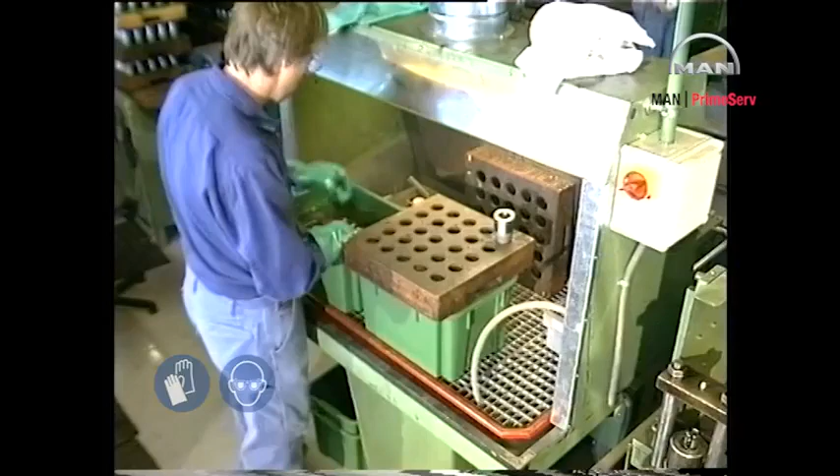All spindle guides are function tested before they are delivered.

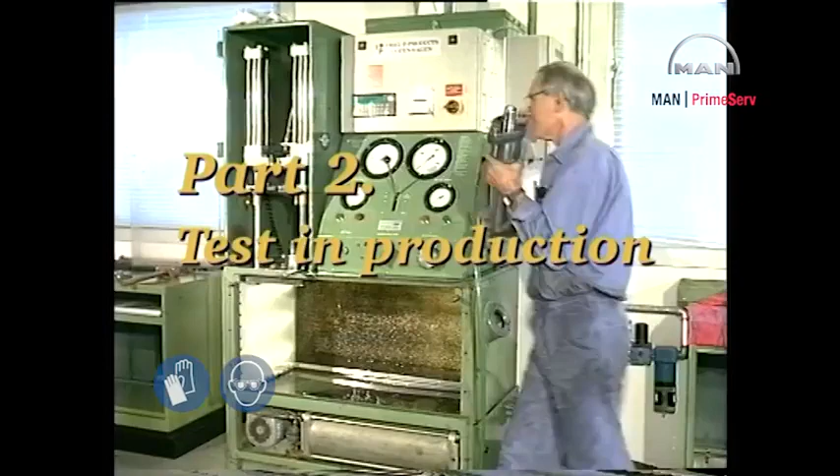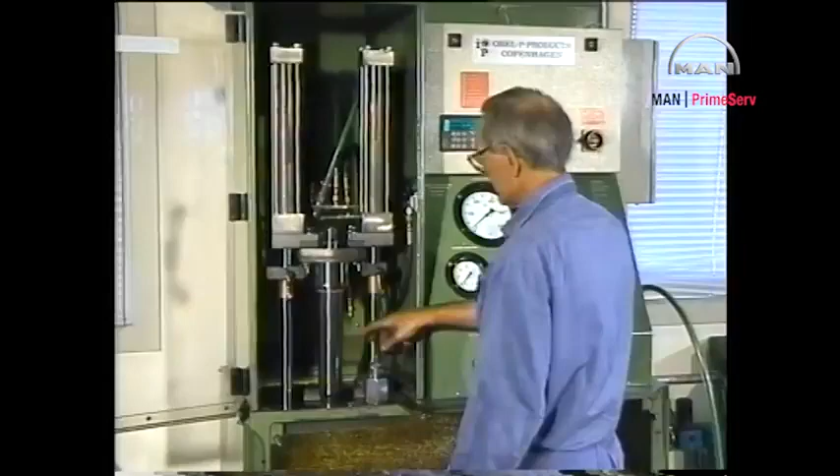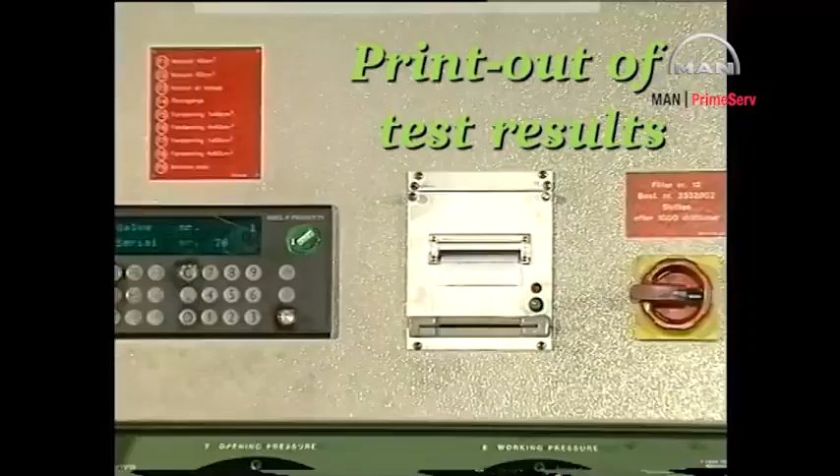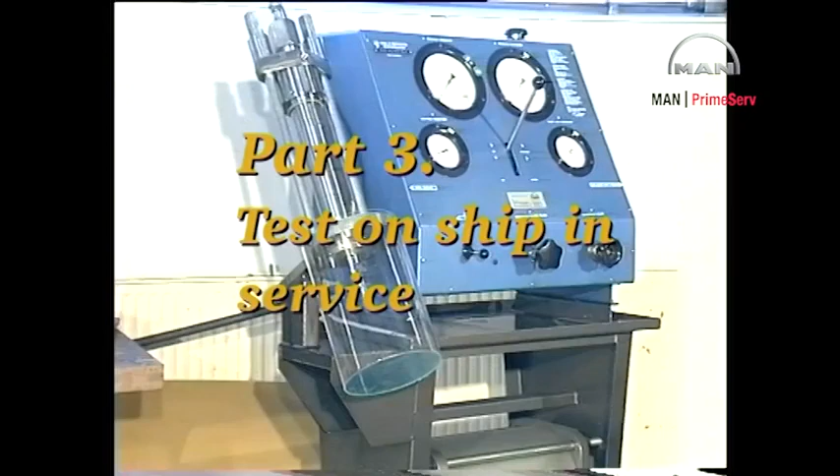All fuel valves are assembled and function tested before leaving the workshop. Overhauled fuel valves or fuel valves taken from stock must be function tested before they are mounted in the cylinder cover. The pressure testing pump is equipped with pressure gauges for displaying opening pressure, working pressure, venting function, and air inlet pressure.

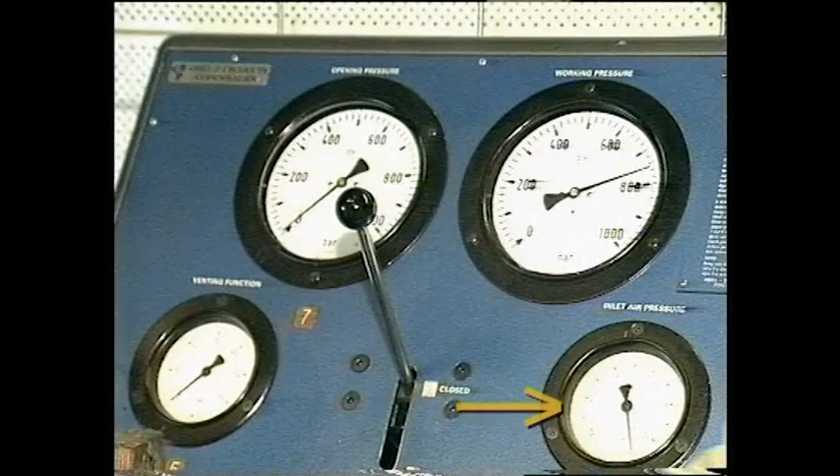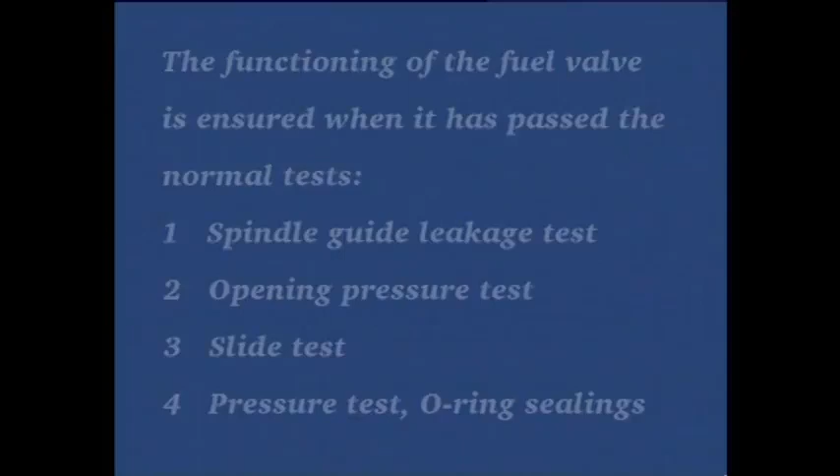Position the fuel valve in the test rig. For guidance on how to operate the pressure testing pump, refer to the supplier's special instructions.

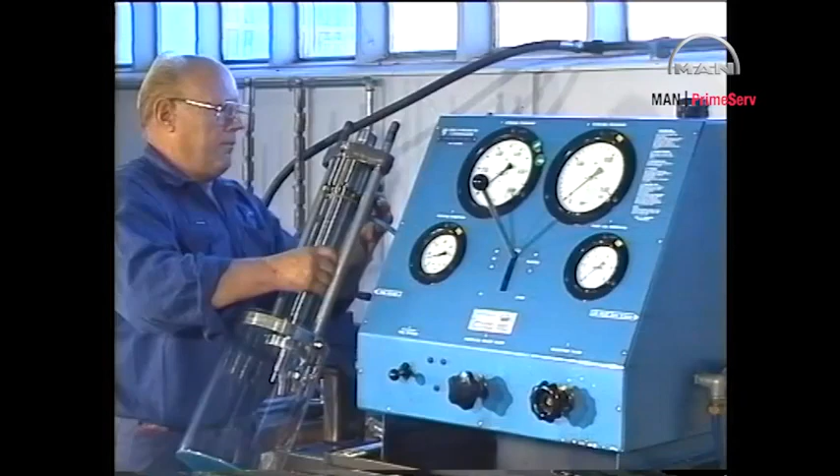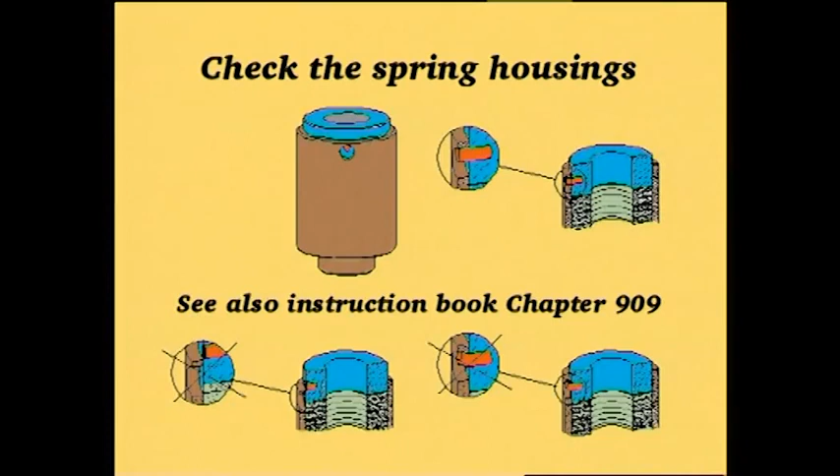To ensure that over-tightening has not taken place, check that the locking and indicating pins have not been bent or broken off. In the event of over-tightening, mount a new spring housing.

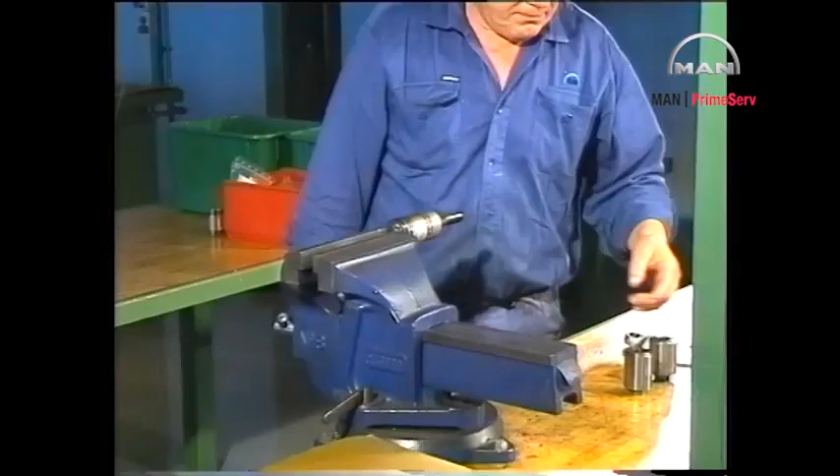A very important element in the correct functioning of the fuel valve, both during testing and in service, is ensuring that the spring housings apply the predetermined tightening force.

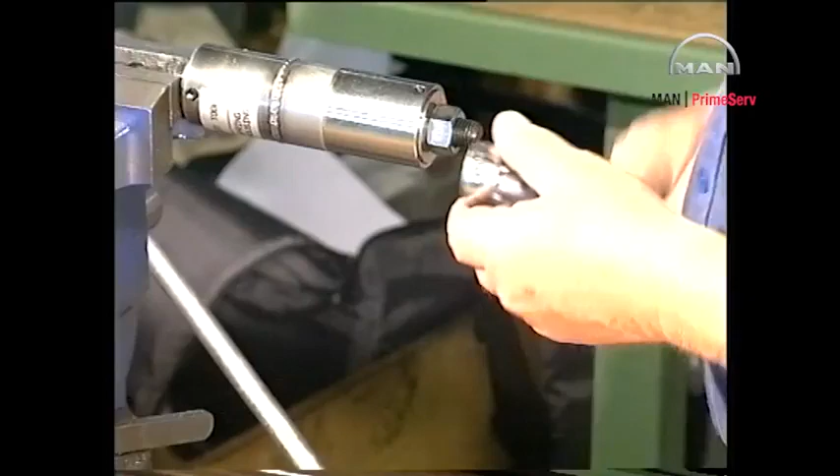To ensure that this force is present, a special tool has been designed to check the calibration of the spring housings. We recommend that the calibration of new and especially old spring housings be checked before they are mounted on the engine or on the fuel valve test rig.

Tighten the nuts until the top face of the pressure disc is flush with the top face of the spring housing.

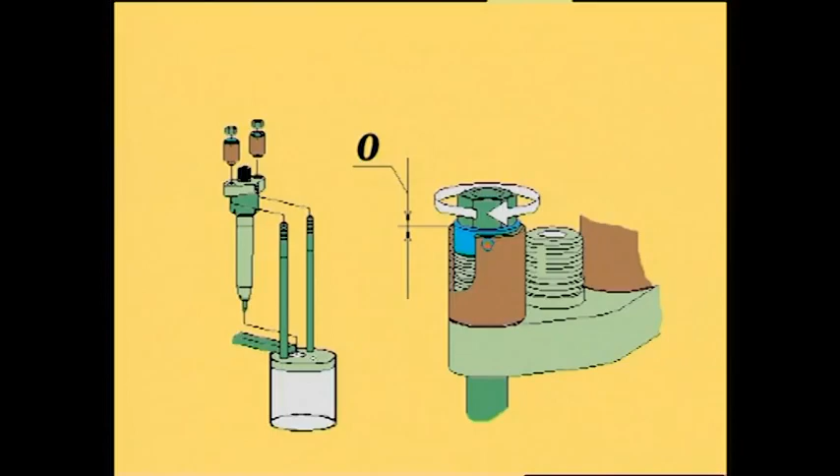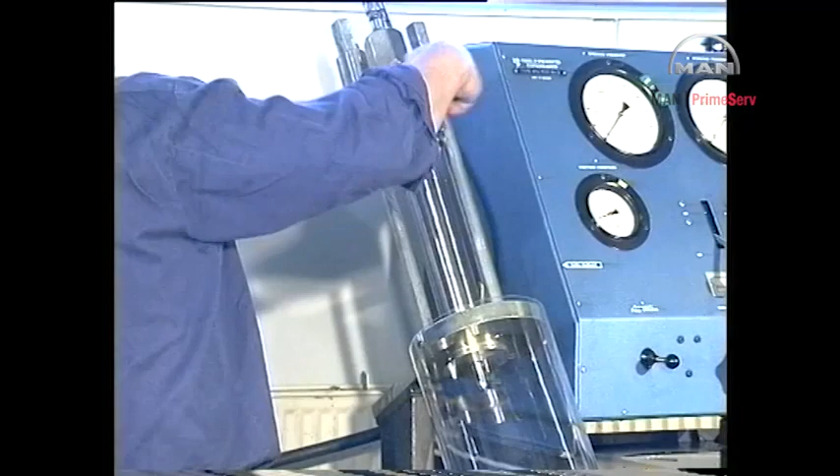Fuel valves are available in 3 different designs depending on engine size. Refer to your instruction book to see which valve is to be used on your engine.

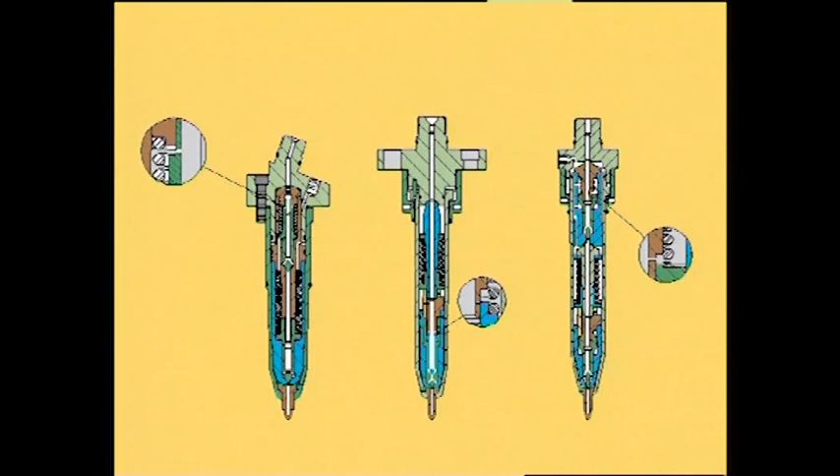The pressure testing procedure is the same for all types of valve. Slowly fill the valve by pumping at low pressure until fuel oil, without air bubbles, flows from the fuel oil return pipe.

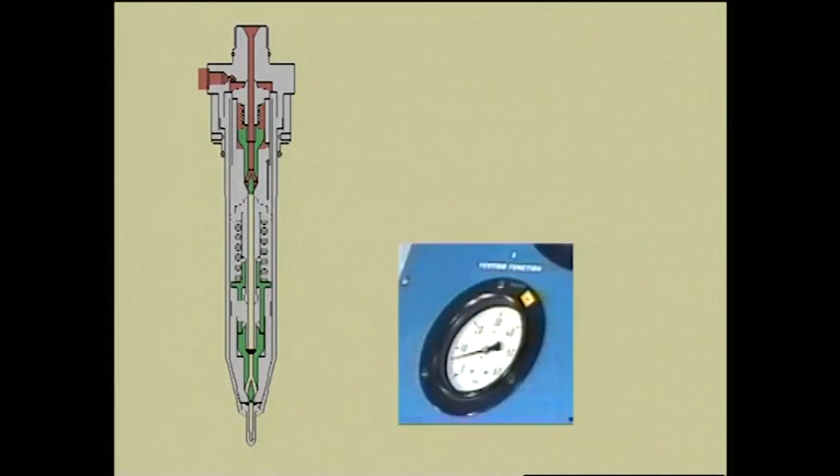Raise the pressure until it is above the opening pressure.

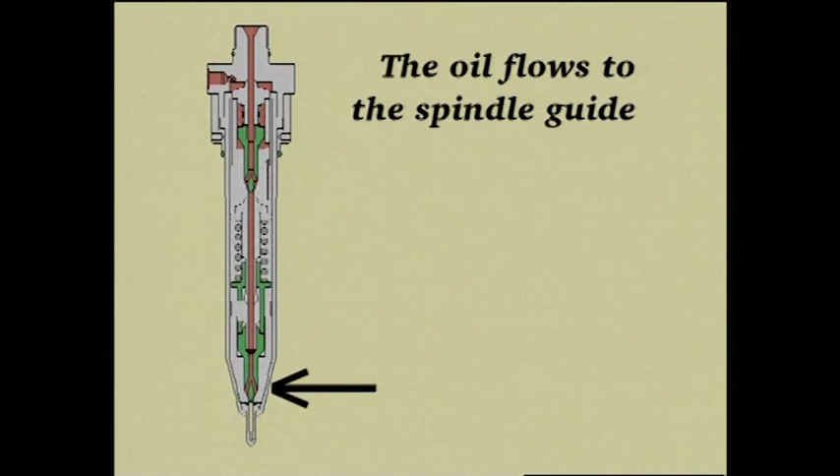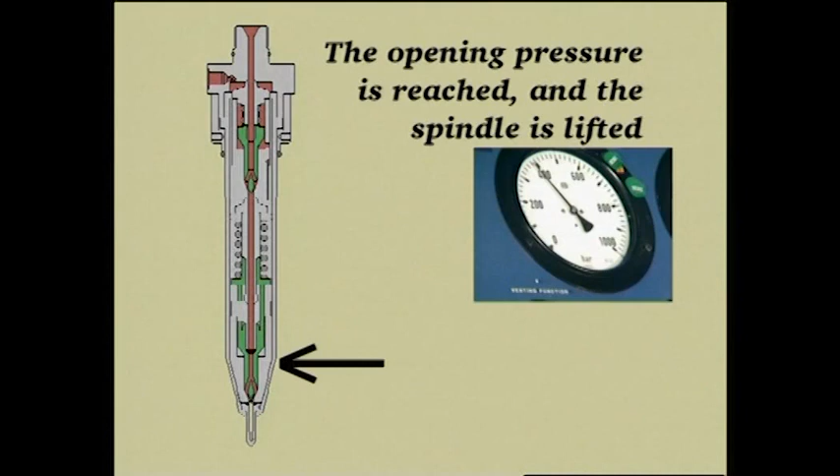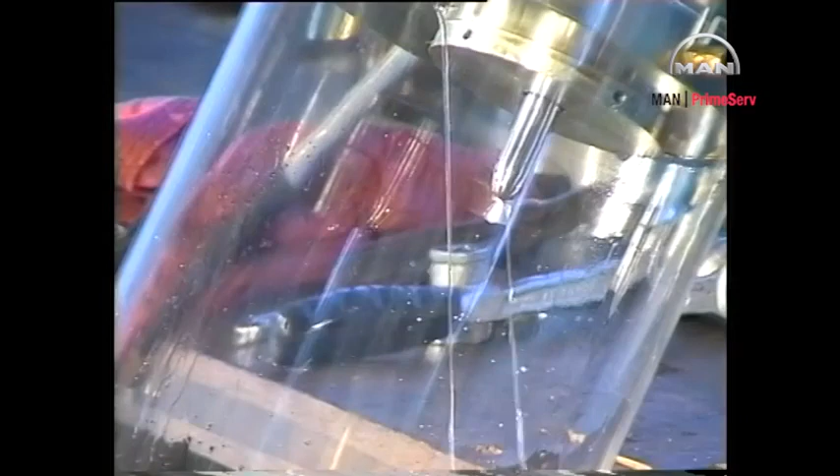Flush the valve for about 5 seconds.

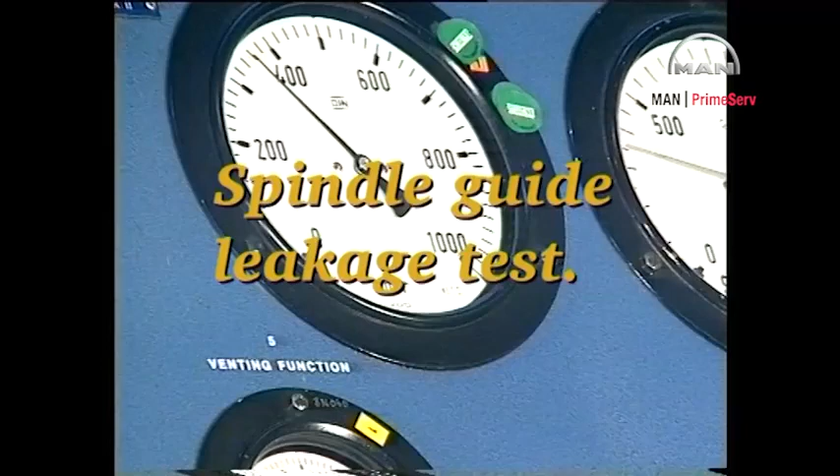There will always be a certain amount of fuel oil flowing from the fuel oil return pipe when the fuel valve is full of fuel oil and pressurized.

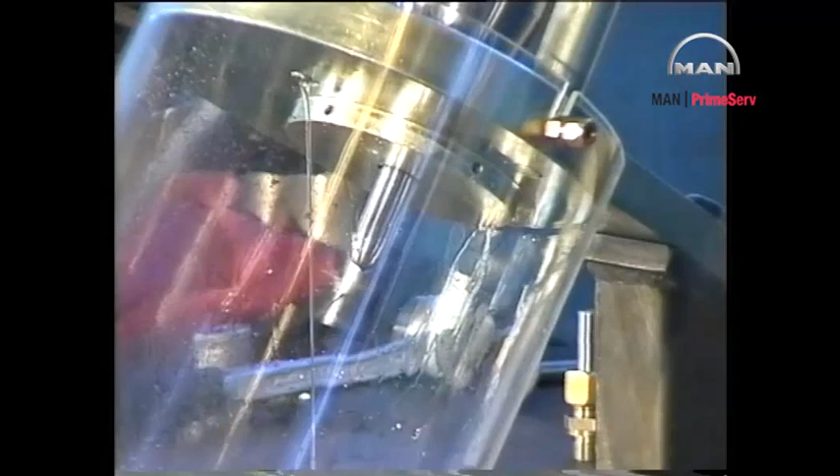Fuel oil must not seep from the fuel valve nozzle holes until reaching a pressure of 50 bar below the specified opening pressure. If the fuel oil does seep from the fuel valve nozzles, see Instruction Book, Volume 2, Chapter 909.

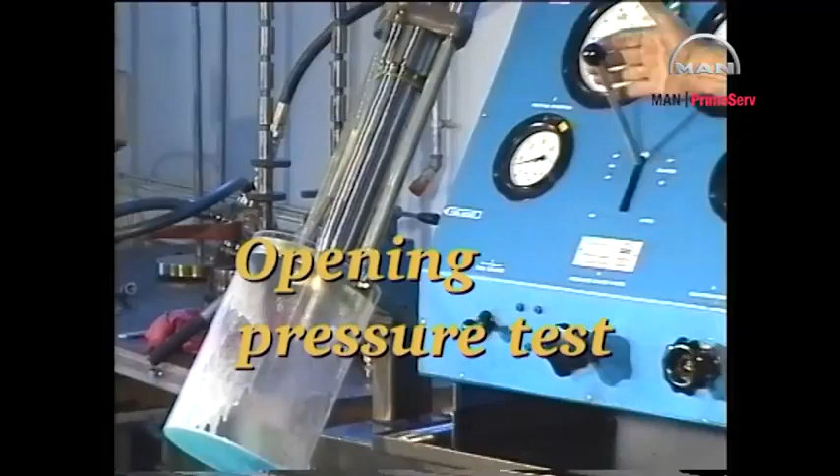Pump 5 to 10 strokes to fully open the valve and to blow out any dirt. Then relieve the pressure.

Slowly increase the pressure until fuel oil is emitted from all the atomizer holes.

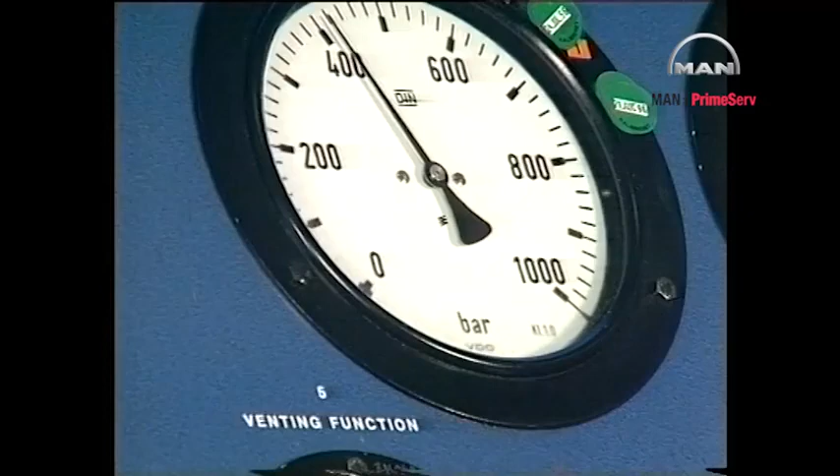Read the actual opening pressure on the pressure gauge marked opening pressure. Compare the actual opening pressure with the pressure specified in the Instruction Book, Volume 2, Chapter 909, and, if necessary, adjust the pressure by inserting or removing discs.

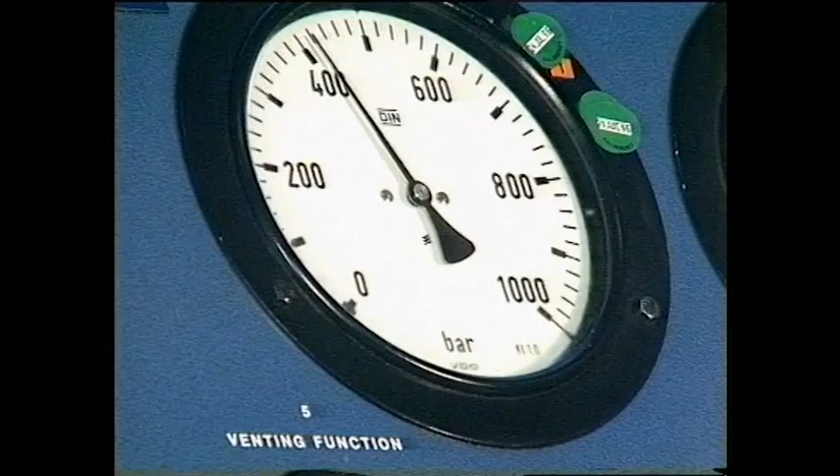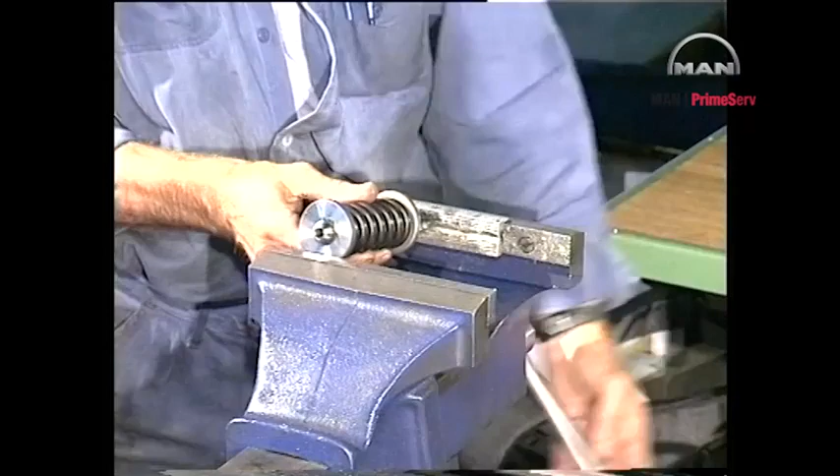Set up the thrust spindle in a bench vise with soft jaws. Compress the spring for the thrust spindle to remove the tension on the circlips, and then remove the circlips.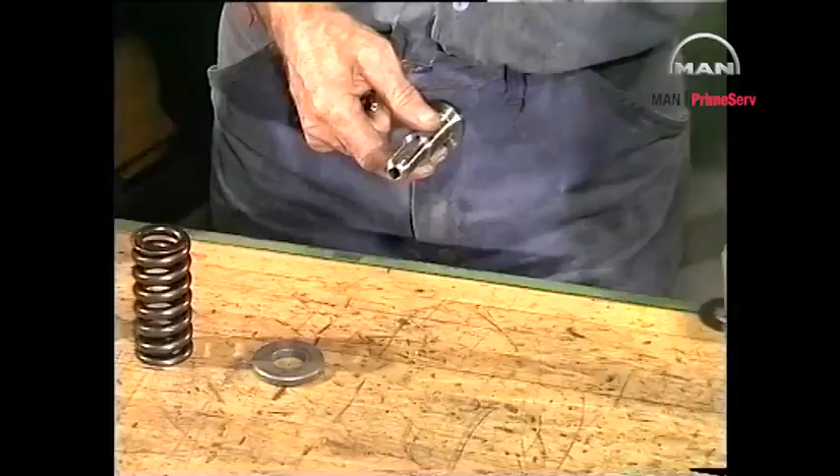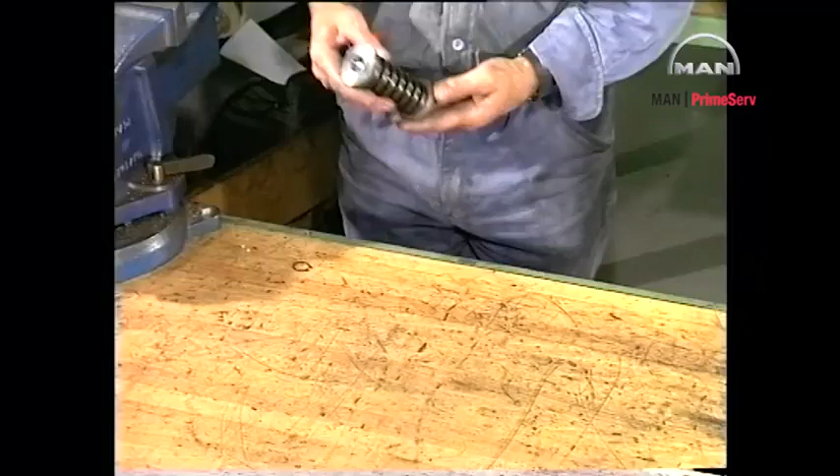Do not insert more than 5 extra discs when adjusting the pressure. The sum of the pressure markings on the extra discs must not exceed 150 bar. The fuel valve must be retested after any adjustment.

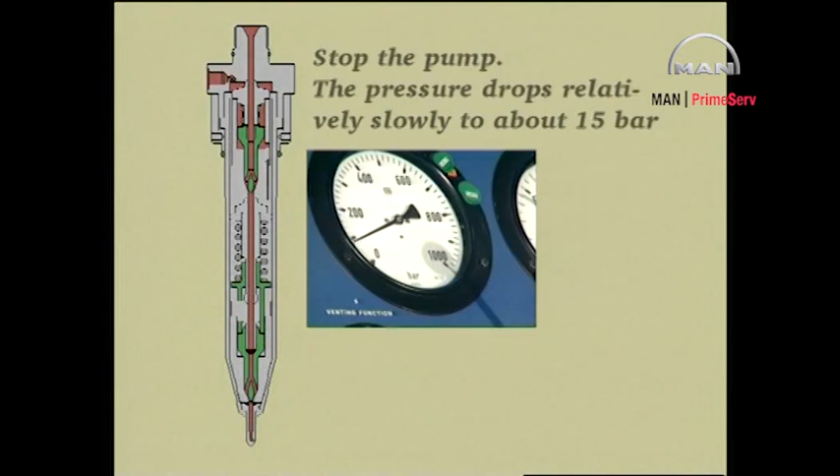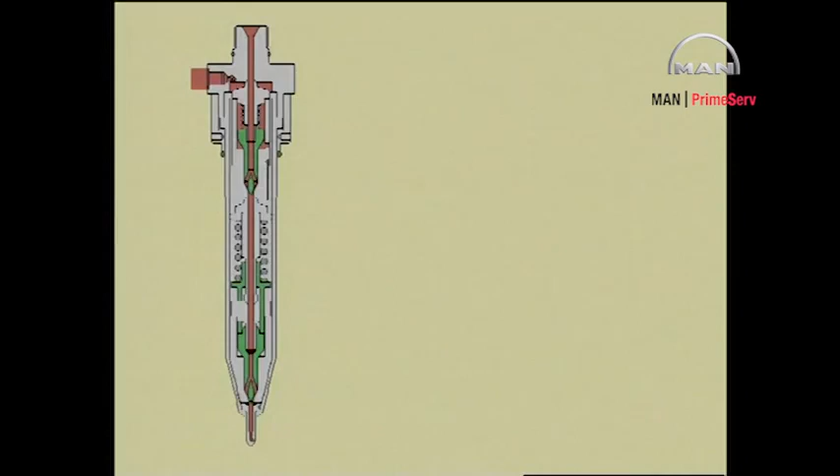If the quick pressure drop cannot be registered, the slide is sticking, or the hole is blocked. Disassemble and examine the parts, replace if necessary.

Slowly fill the valve by pumping at low pressure until fuel oil, without air bubbles, flows from the fuel oil return pipe. Remove the fuel oil return pipe and block the outlet hole with a gasket and a plug screw.

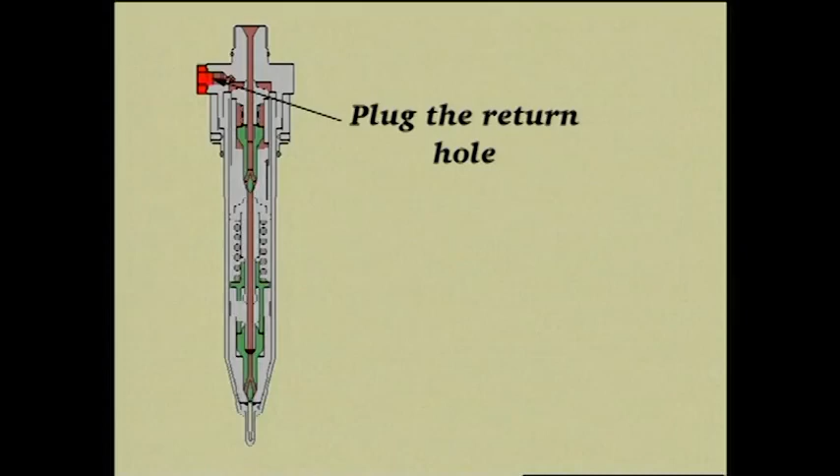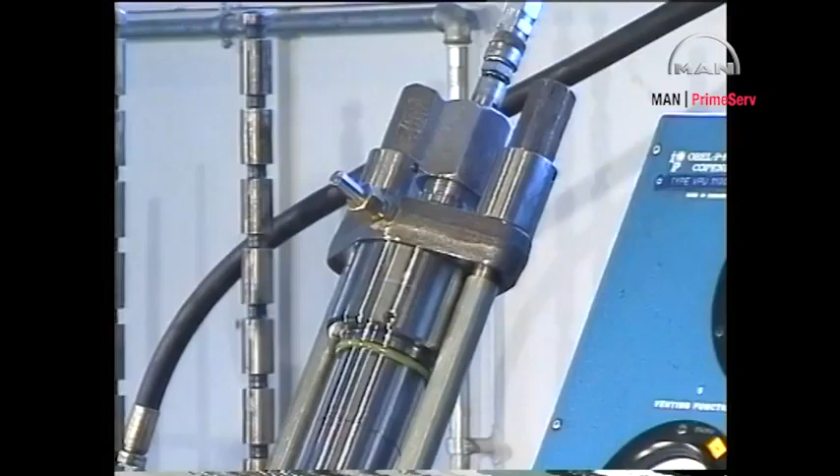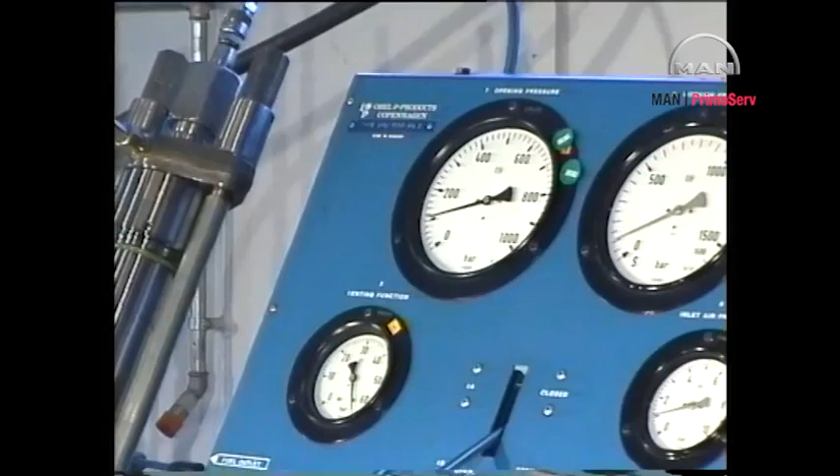Increase the pressure to about 100 bar and move the control handle to the closed position. The pressure should now remain at 100 bar.

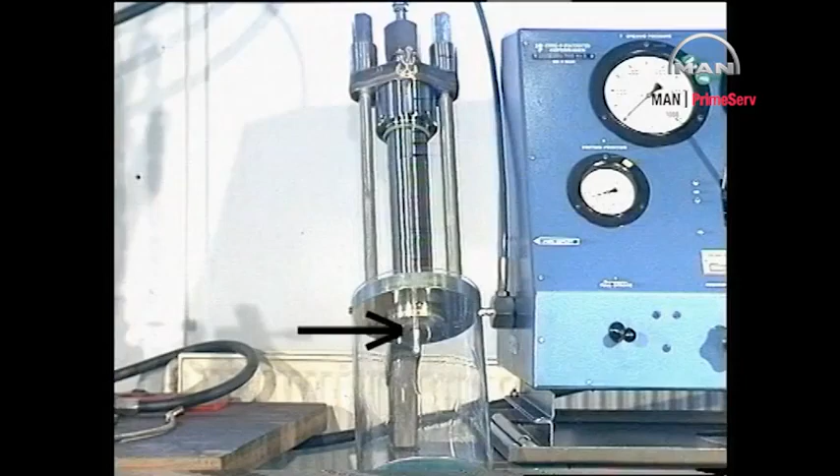If oil leaks at the union nut, replace the O-ring seal of the valve head. If oil leaks at the lower end of the valve, replace the O-ring seal on the spindle guide. After the fuel valve has passed all the tests, it can be mounted in the cylinder cover.

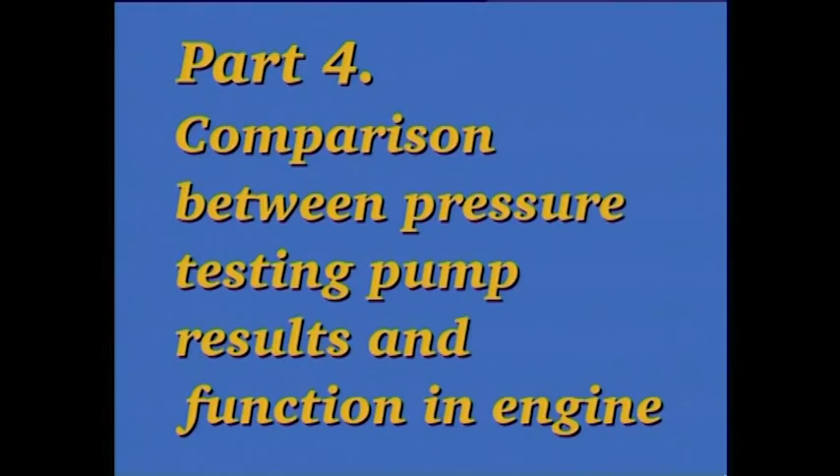The main objective of the normal tests shown in Part 3 of this film is to ensure that the valves function at the correct opening pressures and that they seal tightly.

As the injection capacity of the engine fuel pump is much greater than that of the pressure testing pump, atomization will be ensured during service, provided that the fuel valve passes the normal tests.

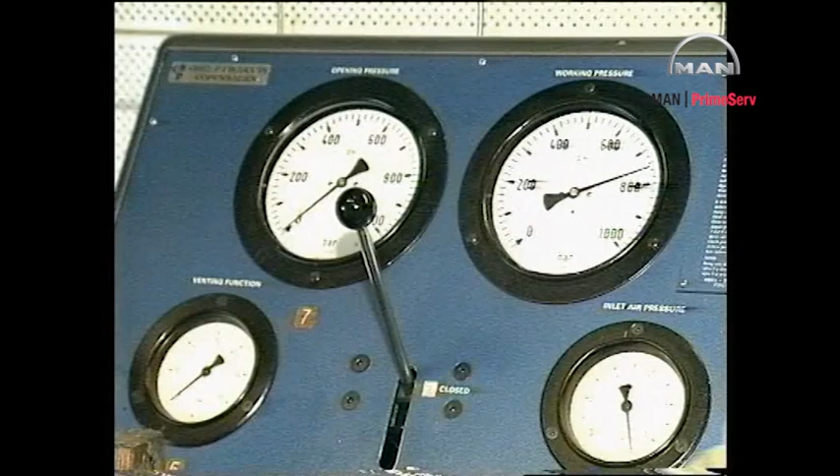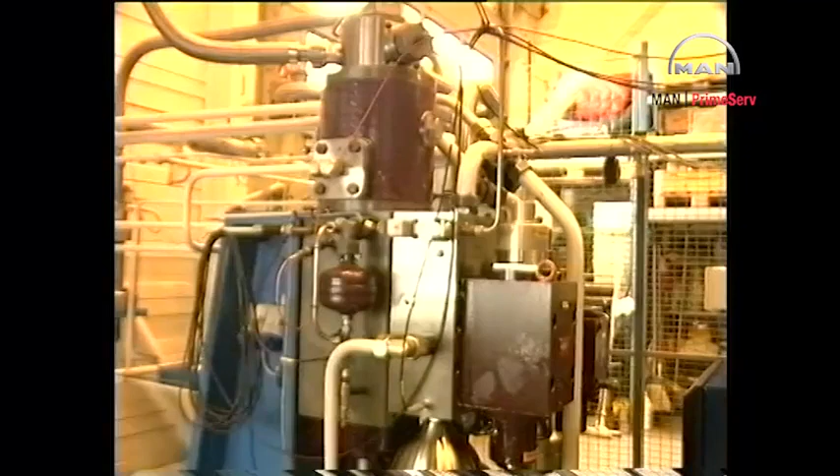The computer-controlled injection system, which is able to simulate the injection into a diesel engine, comprises a high-pressure booster pump, a servo fuel pump unit, and a computer control and monitoring system.

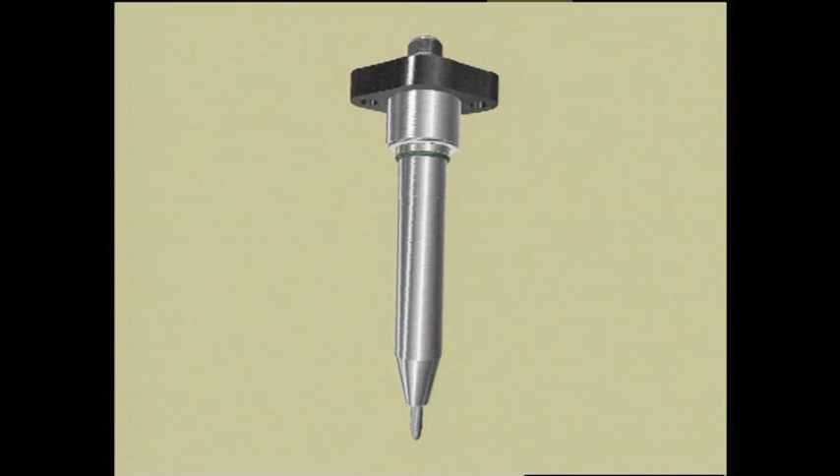Quality controlled spare parts from MAN B&W Copenhagen will ensure continuous and reliable operation.